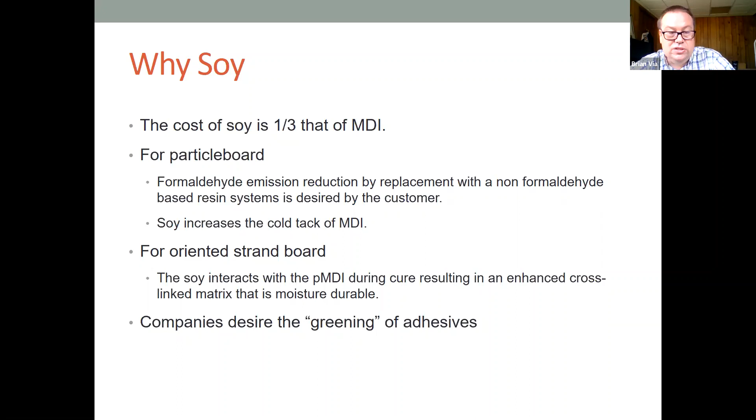This is an important novelty, I think, because soy flour tends to not like water. And so by cross-linking it with MDI, we sort of remove that weakness and turn it into a strength. And also companies are in the desire of greening their adhesives. And so this helps to do that.

We've actually run a couple of commercial trials now in an MDF plant, and I can't really tell who that is, and I'm not giving detailed information either. So just to say we've run 2 commercial trials in an MDF plant, one time a 1.5-hour trial, another a 4-hour trial. So we're going to run another trial in the near future. Hopefully that'll be even longer.

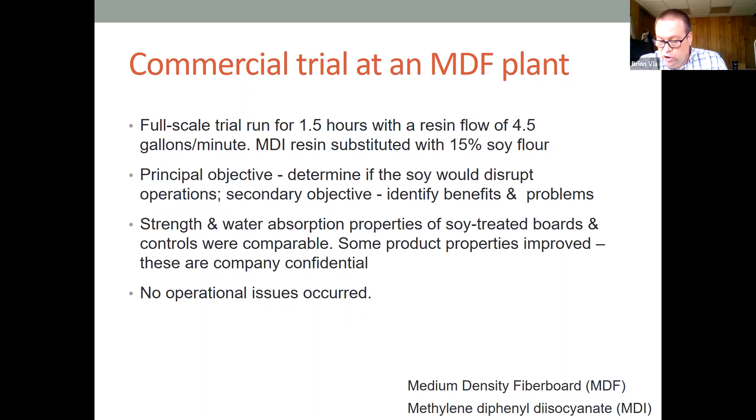And so our objective with these trials is really to see if we can transition over from a lab scale to a mill trial scale, and we've been very successful. I would consider we've had no operational issues so far, and our water absorption and strength properties tend to be comparable, and in some cases there's actually improvement in properties which I can't talk about, and in some cases I probably don't even know what those improvements are. Only the company may know that.

During our first trial, and we got rid of this during the second trial, but I wanted to point this out, you see these specks, if you can see where my mouse is circling these specks here. And so if you don't mix the MDI and the soy flour into a homogeneous mixture, then that can be an issue. And so that's really what we've been focused on ever since Will Ham was here, is trying to figure out how to mix this stuff and do it practically and get it inside the product.

For the trials, we were able to successfully premix in totes. You'll notice it says viscosity increases with time, so it thickens over time. So you can't let it sit overnight. If you do, it's not going to work the same. And so that's a constraint that has to be considered.

Basically, both trials have worked, and so we're working closely with the MDF industry. One thing is that for this technology, we probably need to use an inline liquid solid mixer. So we found these units that are available in the food industry. It's just a matter of transitioning over to the forest products industry.

So one of the things we found was that the flow of our stuff was less than what the wood industry is used to seeing. And so we're just trying to figure out how to get the manufacturer to make it where it flows at the correct rate for us. So not a big deal.

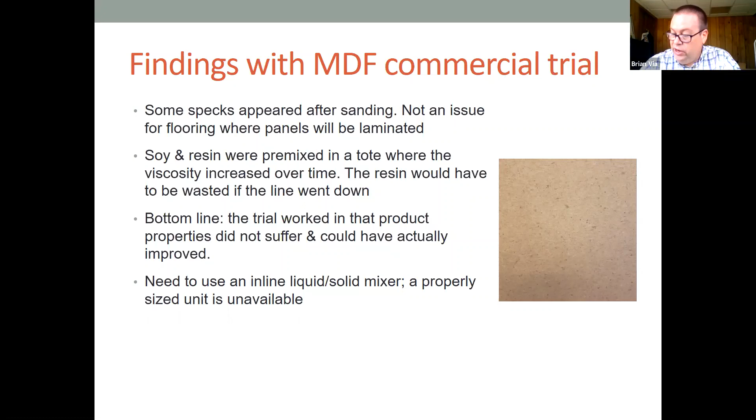Another value that we found that we weren't really looking for is with the metal platens that you use. In this case, we were making MDF, and when we made the MDF, you can see here on the left we didn't use release agent. So release agent is used to prevent the MDI from sticking to the metal platen. So the release agent can be quite costly.

At least it was a long time ago when I worked in industry, which is about 13 years ago. I can't believe it's been that long.

So you can see when we don't put release agent and we don't have any soy, there's a lot of sticking there to the platen. And then as you start to add soy at 10 and then 20%, you can see there's a lot less sticking. So it helps to mitigate and interrupt the bonding between the MDI and the platen. And so we're hoping that this could be a benefit in terms of the cost of release possibilities for these composites.

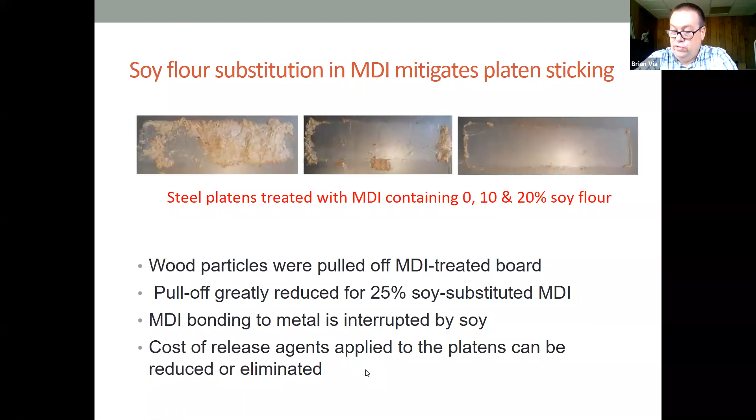We've also looked at hardwood veneer. So the hardwood veneer, this one, we've looked at different species here. You can see red gum through poplar, and we've looked at different spread rates. So the thing about the spread rates is that you have to find something that's cost effective, and so we haven't really found anything for that yet, but we're willing to continue to look at it in terms of the

decorative hardwood veneer. So one of the things that we found some preliminary evidence is that the soy helps to prevent bleed through. So if this was cost effective, the MDI, it's so low molecular weight, it likes to bleed through the veneers. And so the soy helps to prevent that bleed through. At least that's what we think.

But I put inconclusive because at a small scale, we have a spread out of the glue out of the edges, and it comes back over the veneers. And so we get into a healthy debate in the lab about whether we're seeing squeeze out and overlapping, or if it's really not bleeding through. But despite all of that, we found that if we pre-press at 95 degrees C, we can pre-cure the resin and raise its viscosity and eliminate this bleed through.

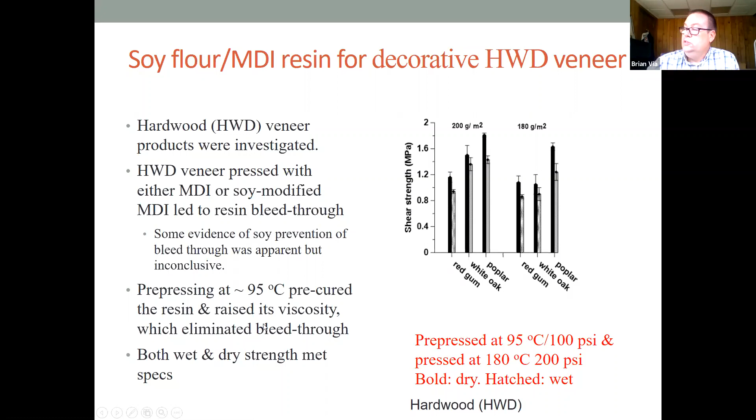I put these grams per square meter in burgundy because when I first saw this 25 and 25, it looked like a typo, like it should be 20, 25, and 30, but this is correct. It's 25% soy at two different spread rates, like I mentioned in the previous slide. So only one failure occurred, where you pass the delamination if only 15% of the pieces fail after the third cycle. And so you can see that this barely failed.

And so it looks like you could easily dial in the right coverage. Cost is, of course, going to be the limiting factor probably, but you can dial it in to make sure that at least from a quality perspective, it passes.

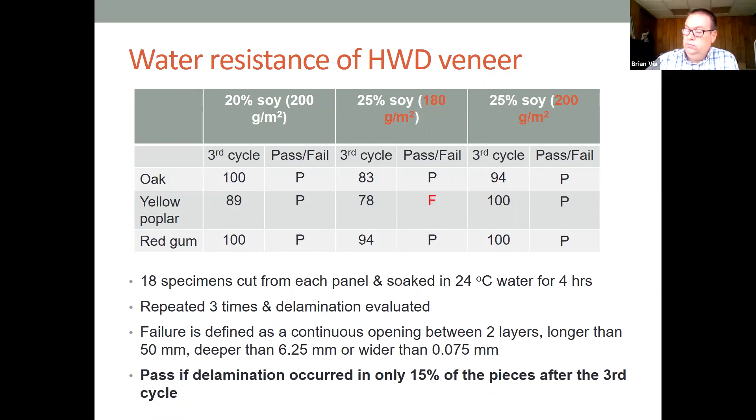This is supposed to mimic LVL, laminated veneer lumber, but I need to point out that this is technically not laminated veneer lumber because these are very thin strips of wood that we made in the lab. So it's laminated veneers, but it should be called laminated veneer mini lumber or whatever you would call it. But we were trying to mimic the laminated veneer lumber just to see if in the lab we can do it, because we don't have the testing capability to do large pieces in the lab. So just comparing it to a control.

And we found that we can definitely substitute up to 20% soy flour into the MDI. Now the manufacturer uses a cold press. And so, if you noticed on the previous slide, we talked about how we were able to pre-cure the MDI. And so we think that we could make it work for LVL in the cold press.

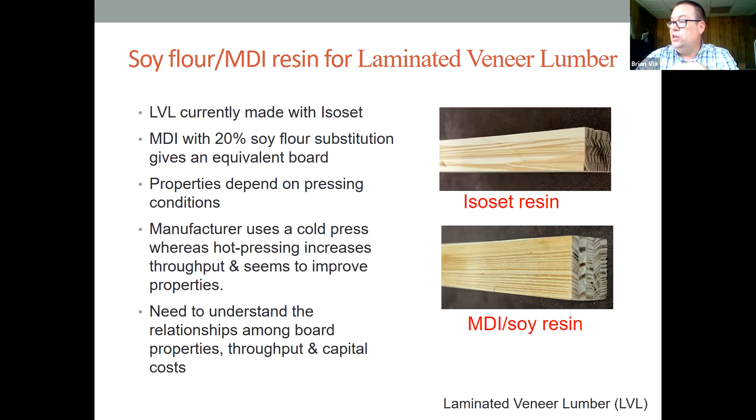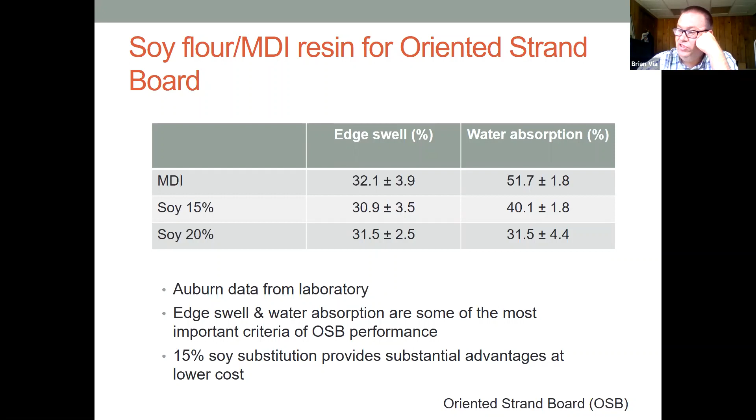And so this was back when we were working on oriented strand board. This was exciting and sort of surprising because the soy flour does have an affinity for water in wood composites, and so that's been its limiting factor. But by pre-mixing it with the MDI and having the MDI encapsulate the soy in the composite, then when it cross-links, the soy is tied up with the MDI, and it actually improves the moisture resistance, which I think is very interesting because MDI itself is known to be very moisture resistant. And so to be able to add something biological to MDI, which is very superior to other adhesives, I think that was a value worth mentioning.

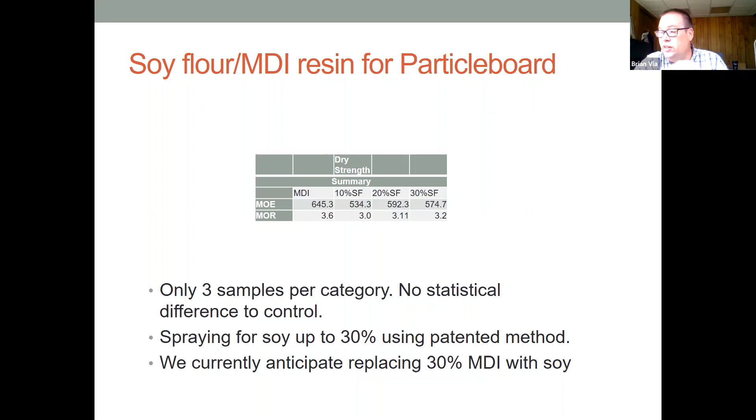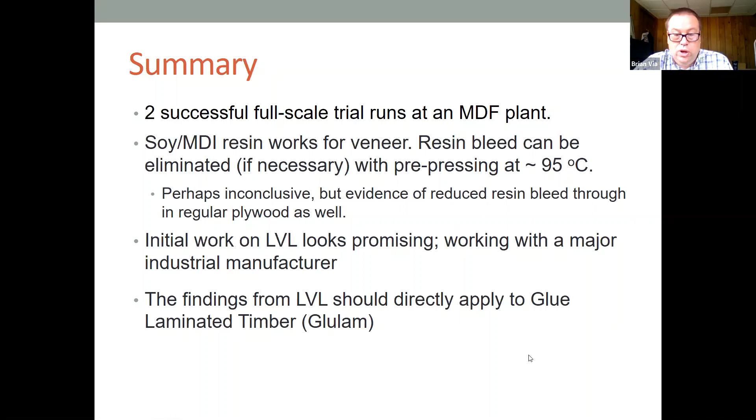So as I mentioned earlier, the soy MDI resin really works. It helps to improve the resin bleed through, and also the LVL looks promising, and we're working with the manufacturer with that. And we're thinking that what we're finding with LVL could be applied to glue laminated timber. So, if there was a glue laminated timber person out there, we would be excited to talk with you, and we're planning on approaching some companies when we get some more data on that.

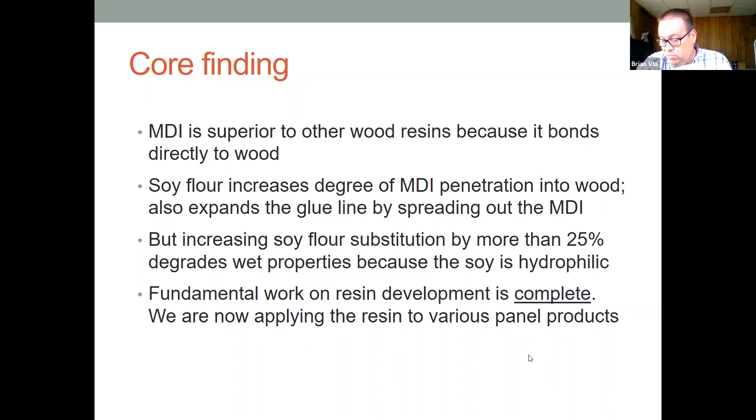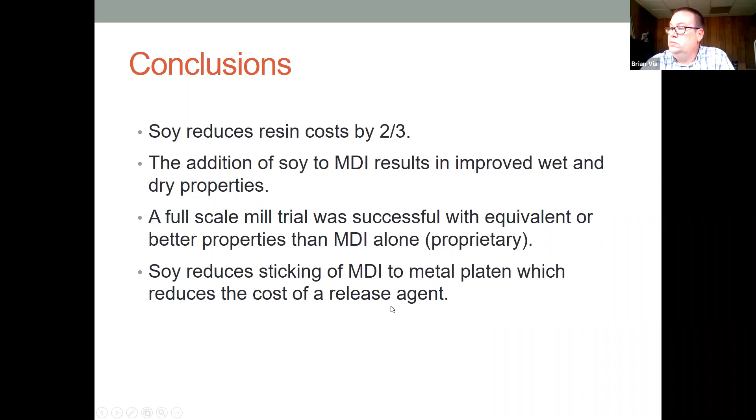So I'd like to acknowledge the folks that have funded this. United Soybean Board has funded most of this work, but I don't want to leave out the Alfa farmers. They provide a lot of seed funding, and so quite often we'll get some very important funding from Alfa, our Alabama farmers, and we'll do some preliminary work, and then if it works in the lab, we'll go to the United Soybean Board with the preliminary data and ask for more money to do a more comprehensive study that could then help us reach out to the company of interest. And we're also working with the Forest Service. We've got some funds with them to do CLT research, and so we plan on leveraging those funds also to see if we can connect to the CLT industry.